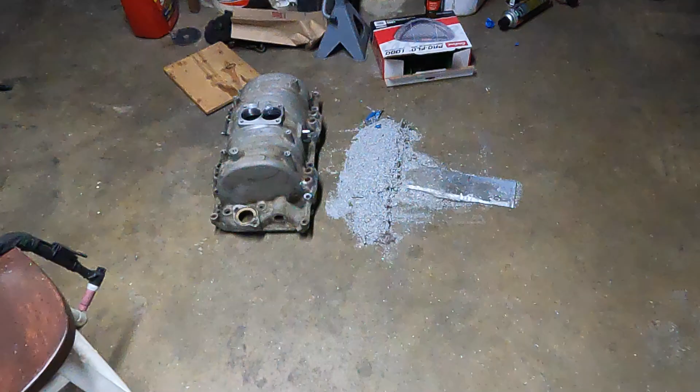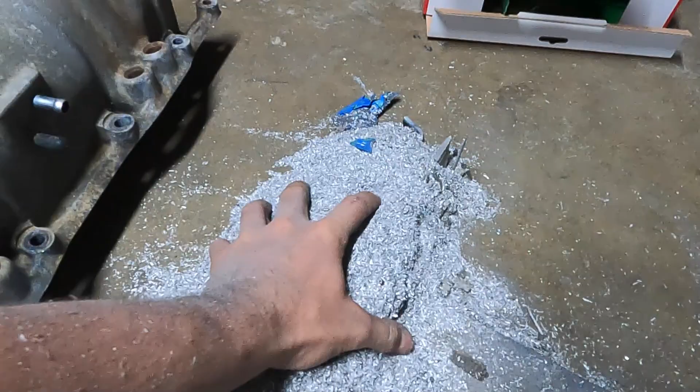I forgot to show you this while making the video, so this will be the intro. This is how much aluminum I cut out of this thing. I swear there's a couple pounds here. So I think this is going to make a difference.

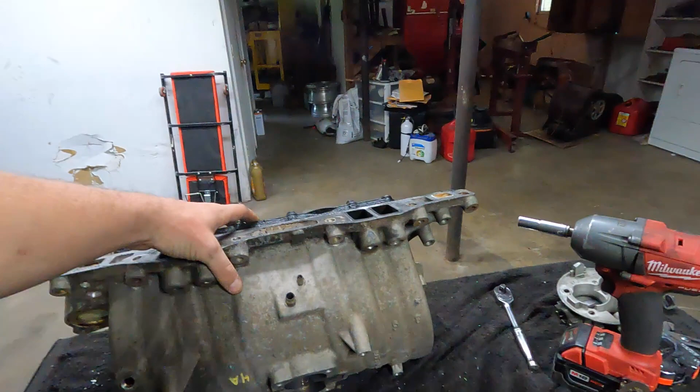So I'm going to get started on the 360 Magnum kegger modification. I was pulling off the bottom pan, so I figured I'd share this first. I didn't have this running on anything of mine personally, I got it from a friend, and he didn't even run it either. The engine came from the junkyard. He put a Speedmaster intake and a carburetor on his.

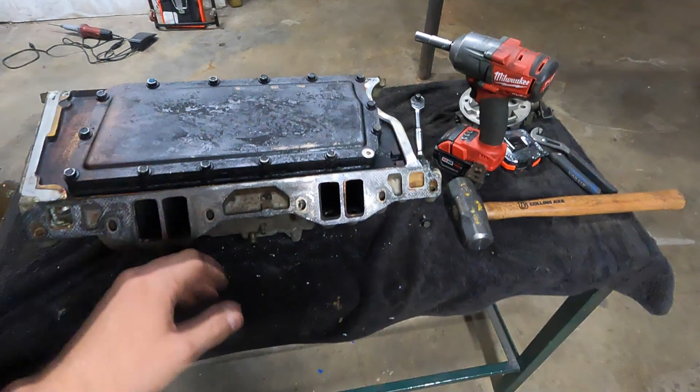But while I was pulling the plate off, I noticed the gasket's blown here. So if you ever have an oil consumption issue with your Magnum or weird running problems, this is a common problem. I've never actually seen it happen on mine, because usually I throw that gasket away and RTV the crap out of it, gray RTV or Honda Bond, it never blows. But that's what you look for. If it's pooched out like that, that's what they do. So I'm going to get this pan off and start addressing and looking at what we're going to do.

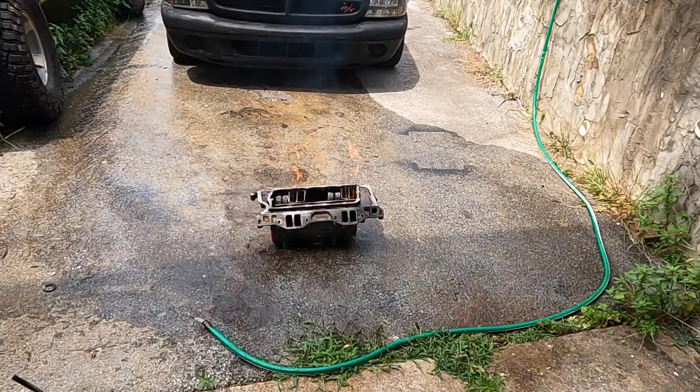I guess I'm going to clean this up. That's going to be the first step, get all this crap out of here, and then we'll move on to cutting that divider out. Right or wrong, this seems to work.

As long as it doesn't get so hot it cracks, watch it melting down the divider, all the oil's just burning out of it. Took a little while, but I got all the caked on crap off. It's definitely oxidized a bit from being harsh with it, with all the purple power and brake cleaner, and I also heated it up a good bit with the torch and lit it on fire. It really helped loosen that crap up.

But I'm going to end up sandblasting it anyways, I don't care, it's fine. I'm not going to touch the inside yet, I'm going to start here. I've already marked this one. I've already marked it.

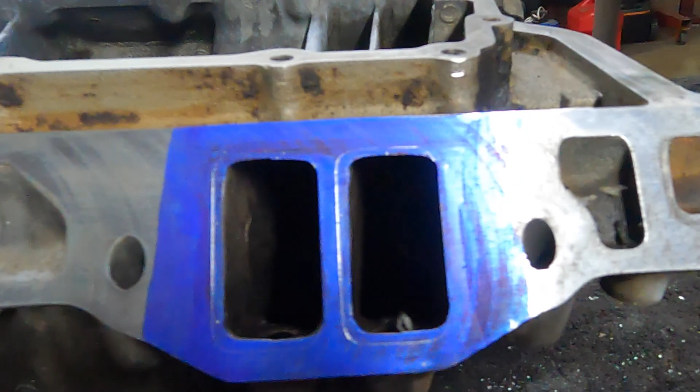What I like to do for the gasket match is, there's always a little discrepancy, you know, because you can see the holes in the slop you have in the holes, it could be off a little bit. So what I like to do is offset it one direction and leave it there on both sides, so that when you put the manifold on... when I had my blower manifold, the runners were like this long, you could just see straight down through it, line up the manifold, tighten it down. This, you're not going to be able to do that. So I like to offset it to one side on both sides, so that whenever I put my manifold on, I shove it to the rear and I'm done.

That should be set. Is it perfect? Probably not, but it's got to be better than putting this in the middle, because then you can't even eyeball it, you can't see it, you can just kind of guess where it's at. So I always offset it to one side, mark it, and that's what I do. So whenever I bolt the manifold on, I set the bolts in, shove it to the rear, tighten the bolts down, done.

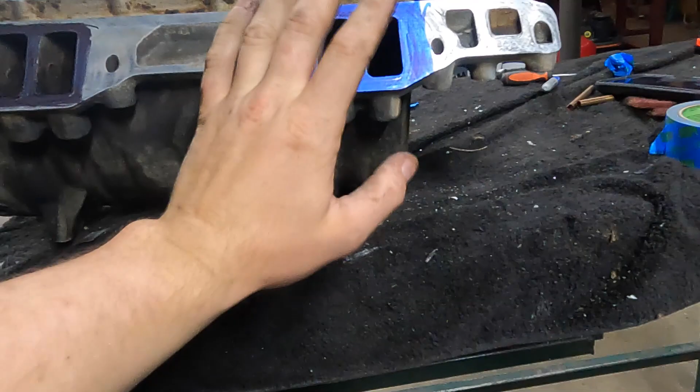So I'm going to get started on this end of it. I'm just going to take everything out to the lines, I'm not going to port that deep yet. I'm just going to do the gasket match, and then I'll work from there.

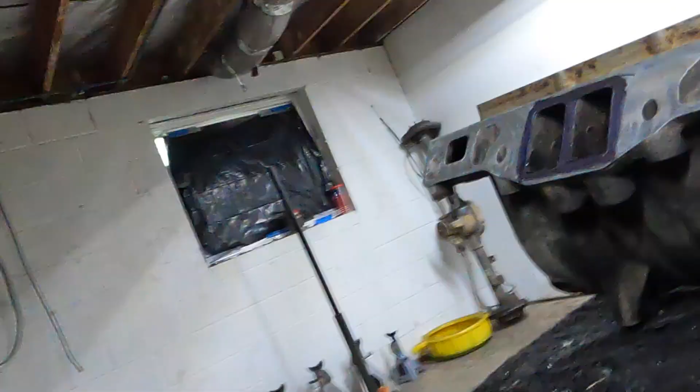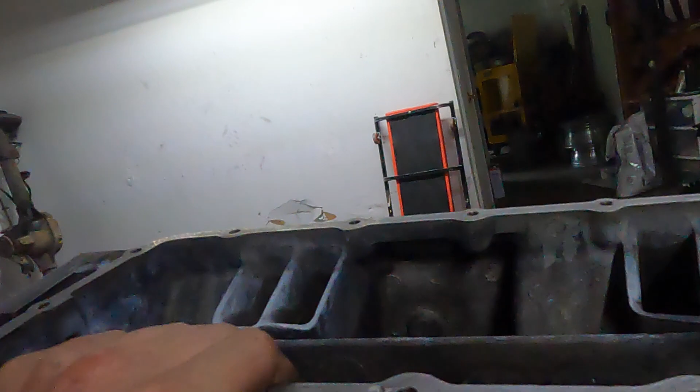I don't see how you're only getting so many inches of runner out of this. These inner ones you could probably get a bit more, and that makes sense, but these outer ones, if you cut this down below where these runners are and the entry is so far down there, I don't see that flowing well. And maybe it does, and maybe I'm wrong.

The last one I did, the one on the Dakota right now, was cut down to here, that's as far as I went. But I also went in and knocked the divider down another inch, thinking that with this much more area to feed the two runners down there, it would slow the airspeed down and make it a little happier coming around these edges. I think the volume reducing plates aren't just reducing volume - with a flat plate right here, I think it's helping the entry to the port.

So if it works, that's why I think it works. As always, make sure you use some kind of wax or something, or else you're gonna have a bad time. I've seen people do this with a Dremel - I don't recommend that, you're gonna be there forever. Just get a real grinder. This one is just a Harbor Freight special, and I've got a Foredom pedal, I think I got it off Amazon. It does speed control, so it's variable.

If you try running these wide open, it can get pretty chaotic. So I'm gonna open this one up, and then I'm gonna stop and get the dividers and calipers out, and we're gonna measure the difference between non-opened and opened. We're just gonna measure the area of the port and see what it ends up at, just on entry.

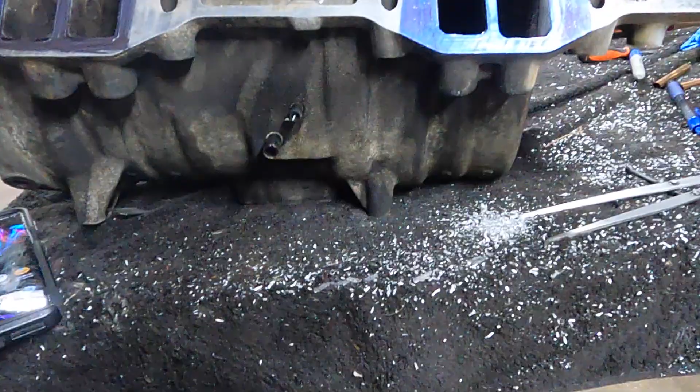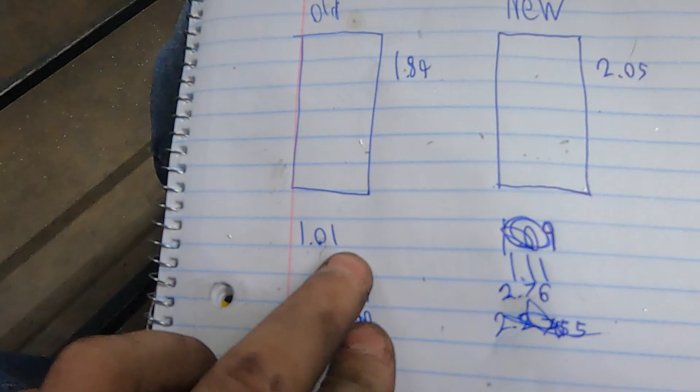Alright, I've got one done, just the first 3/8 to half an inch of the port. So here's not touched, and here's touched. We went from 1 inch and 10 thousandths to 1 inch and 110 thousandths, which looking at the gasket, we gained about 100 thousandths width. Went from 1.89 to 205, which also looks about right. We gained a little meat here and a little up here.

Good jump. Now we just got to see how far down the runner we can open it all up. I've already noticed that once you go past the entry, or exit I guess, once you get past here - let's see, get this dialed in - see, we're tight.

You get back here, it opens up a little bit this way. I think it gets taller as well. So we may not have to work so much of the manifold where we can't get to. Let's see, that's just scrubbing. Yeah, it gets taller.

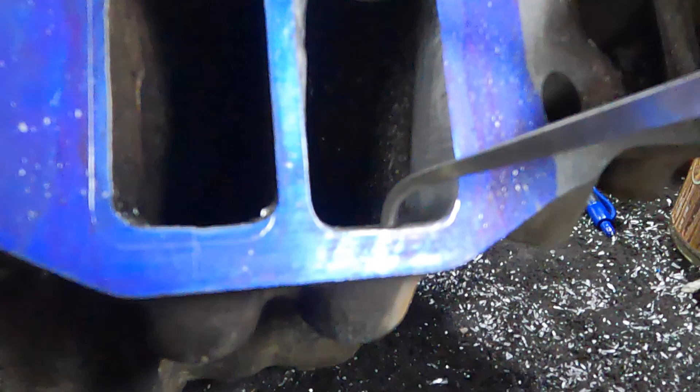So we'll check it on this one that we just opened up. Have it scrub right there. Yeah, so it gets taller and a little wider further down the manifold. Now I don't know if it stays like that through the whole course, but we'll do as much as we can. So I'm gonna get the rest of these to this point, then we'll move forward.

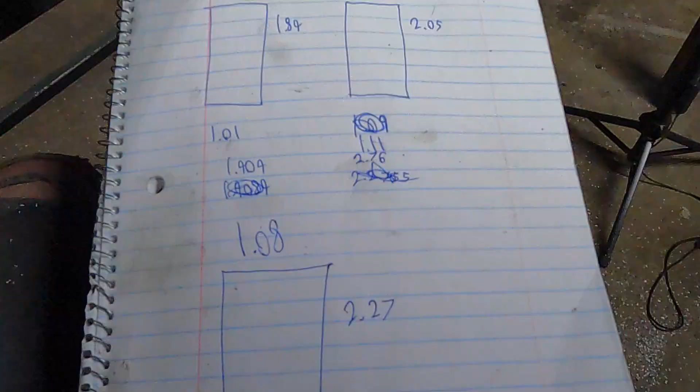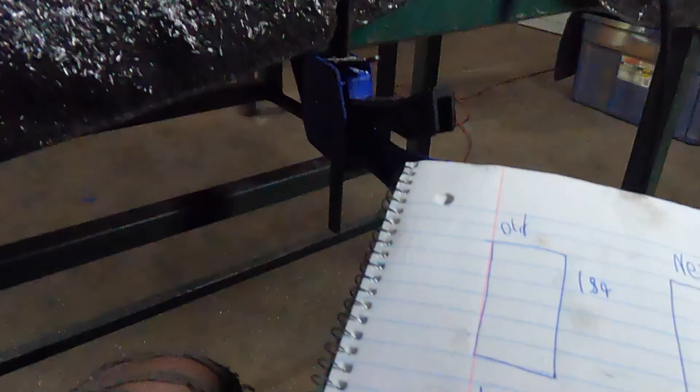We'll see how many thousandths we got to take to make it as wide as this. I could only get so deep, and you kind of got to hit it at a weird angle getting in here. But where I've got it set, see, I still got a little play. But if I go too much deeper, I hit the arm, and if I go right there, I'm a little snug. So I called that our base measurement.

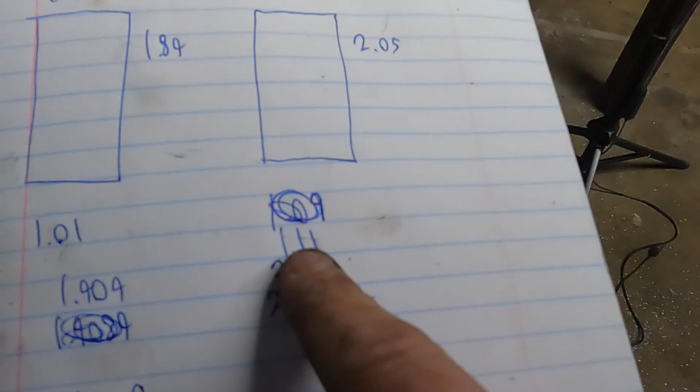We're at 108 width, 227 height, which is still - the width is smaller than our new port, but it's almost 200 thousandths, a little over 200 thousandths taller than our new port. So the height is going to kind of make up for the lack of width, I hope. I don't know how far up the manifold it stays that thick. If I really wanted to get crazy, one day I'll just buy another manifold and cut it in half, but I'm not doing that today. So, alright, longer bit, and we're going to see how far down there we can get.

I've taken this one about as far as we're going to go. Dang it.

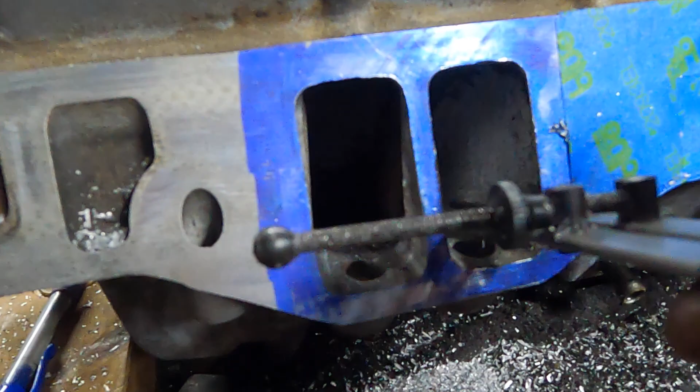Let's see, right there. I can get this all the way, and it's dragging towards the bottom, but just barely. When I hit it with a sand roll, I clear the rest of that up. So this, that wide, all the way down. At that point it's already taller this way, so it shouldn't matter that much more. Where this one is, not so dang much. So now we'll see what our height looks like.

Knocking down where that injector boss is helped the height a lot in that area. And then it's just big in here. I don't know how big that is because I can't measure it accurately, but it's bigger than this, so

that's probably fine. So I'll be doing all the rest of these, and if you're doing this when you can't see anything, don't blow in the damn port, because it'll just shower out of the other end. Like I did.

Alright, I'm going to get after it. This side of the intake has had a lot more core shift. I'm having to pull most of the meat out of this side of everything, so I've barely had to touch this wall and this wall. It looks like it's going to be the same down here at this end, so everything is shifted. I guess it's actually shifted that way. And that's why I'm having to take a good chunk - that's a 1/4 inch right there at the top.

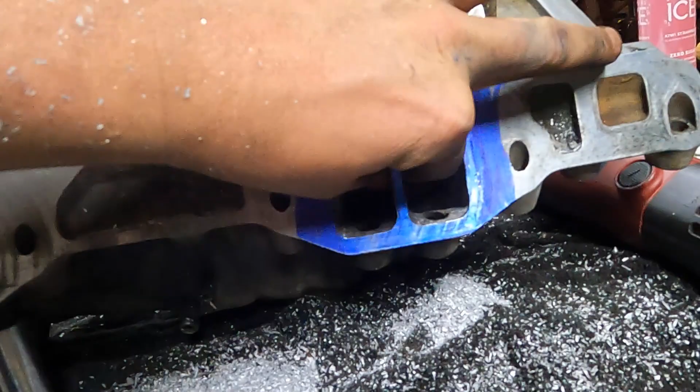It's not so bad on these two. This one, I just cleaned up this wall because it was already straight in, so I had to make this fairly thin, where the other side I was able to kind of split the load between both walls. This one I had to take most of it out of one wall, so it's still fine. It should be just as thick as this side.

Yeah, but I got 3 more to go. So all of this side is done. I've decided I'm not going to use those plates since I'm going to shorten the runners as far down as I can. I'm just going to come down to this level. So I'm cutting this divider all the way out.

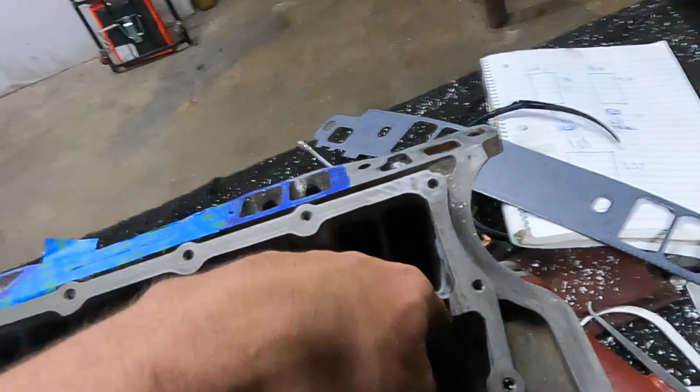I'm just going to take my bit, run it down both ends until I go all the way through, and then run it across the bottom until it gets thin and just knock it out with a hammer. It really wasn't that bad. I ran it down this side and ran it down this side till it went through, and then I just started kind of grinding along the edge of it at the bottom.

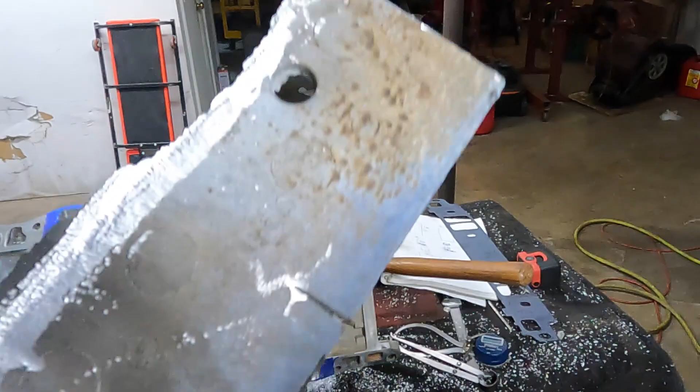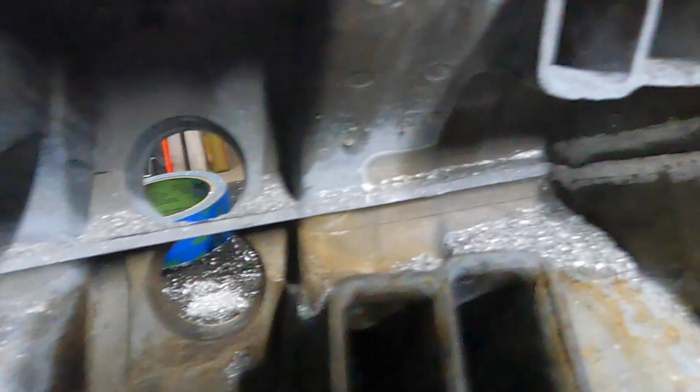I didn't really even do that much. I just ground it and smacked it with a hammer and it broke off, and this is all that's left. So I'll start working all that out of there. Do yourself a favor and get an intake without that divider.

I mean, this one was free, so it was worth it. If I was going to go buy one, I'd go hunt one down without the divider. I don't know the year split, but I've had several that don't have the divider.

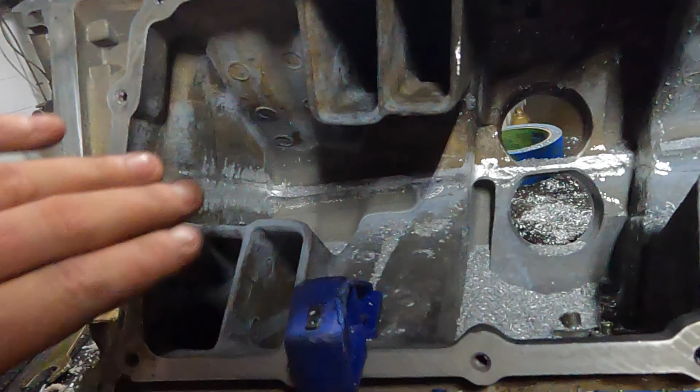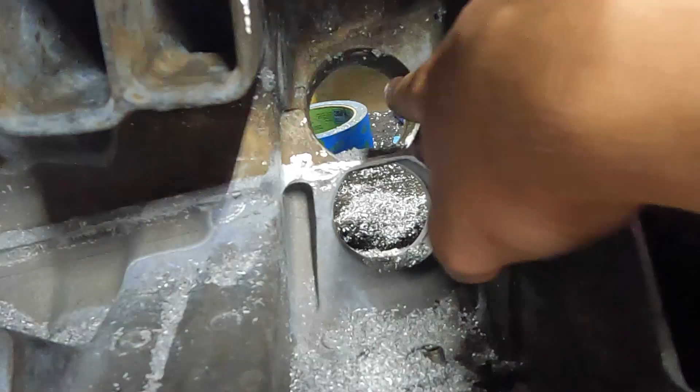So I'm going to leave this alone because I am going to put something in there. I'm not going to put that whole plate, but I'm going to cut the runners down to here, so I'm going to fill that little bit. I'm going to go ahead and do that much. So I think I'm going to leave that part alone for now.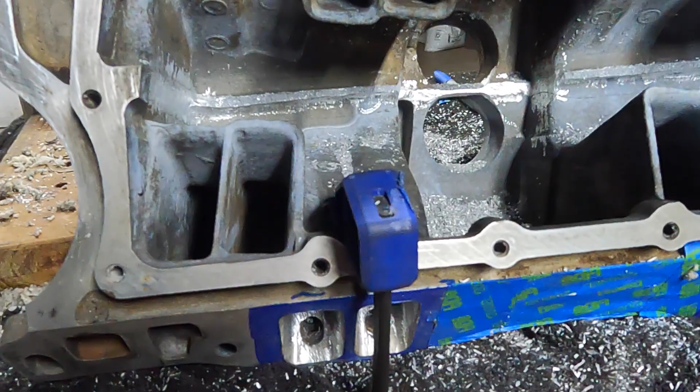Now I'm going to get to cutting these down, and that's going to take a minute. I may change to a very aggressive aluminum bit and just eat through it. I'll try to zip wheel as much as I can and knock it out of there, but this is going to be a project. This is a spot that the little Dremel with the disc might help you because you can get in there, but you're going to be there forever.

This is about 6 hours yesterday getting this side done. I've got about an hour and a half, 2 hours in getting to this point in here. I probably could have done it faster. So there's a lot of hours in doing this. Hopefully it pays off when we dyno the truck again. But I'm gonna get the zip wheel and get after getting as much of this off here as possible.

This is after taking a zip wheel to it. I didn't get super close. I'm going to take this all the way down to here, but I'll be using porting bits from now. You just cut as much as you can. You don't even have to connect your lines. Just get them close, smack it with a hammer, it's going to break off.

There's all kinds of chunks. Lots of chunks. If you didn't connect the cut, it'll break. So now, several more hours of grinding just to get these down to here, and then I'll actually start porting it and opening it up. This is just getting the runner shortened.

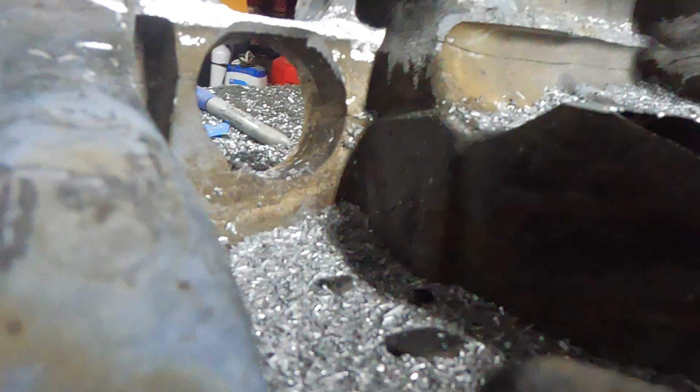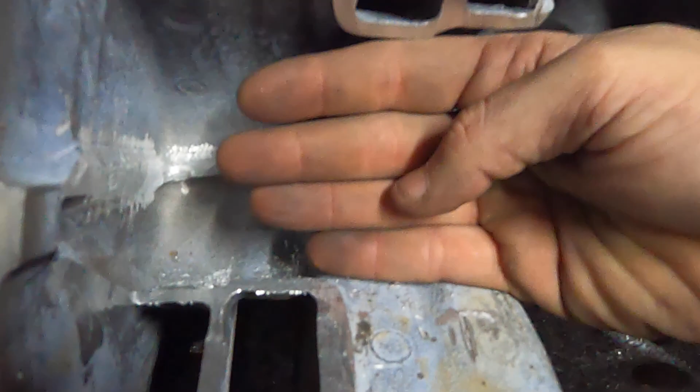I want to fill this in somehow. I don't know if I'm going to take a straight piece across. That's probably what I'll do, I'll probably just put a plate in there. I thought about trying to put a rounded plate, like a piece of tube cut off, to give it more of a bell mouth, but there's no room. There's nowhere for it to really go.

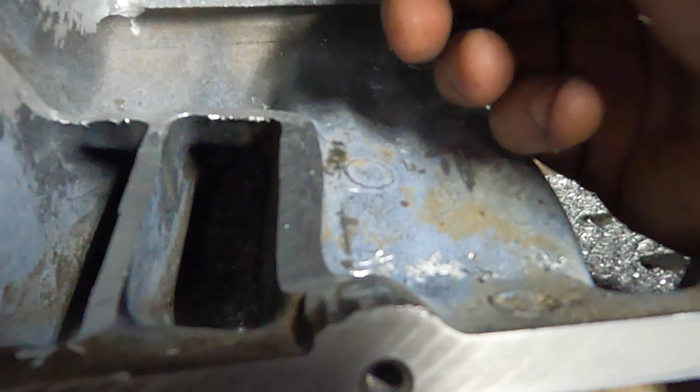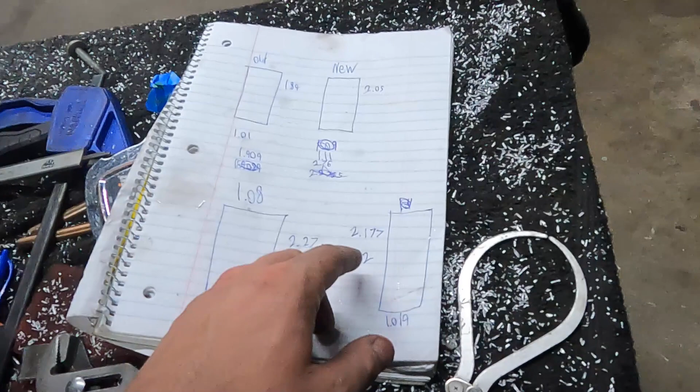Doing my best to keep you in the loop as I go. I'm about to start porting the runners, trying to keep everybody in the loop as best as possible. So I'm going to start porting the runners on this side. I've measured them as is: 2.177 tall, 1.019 wide.

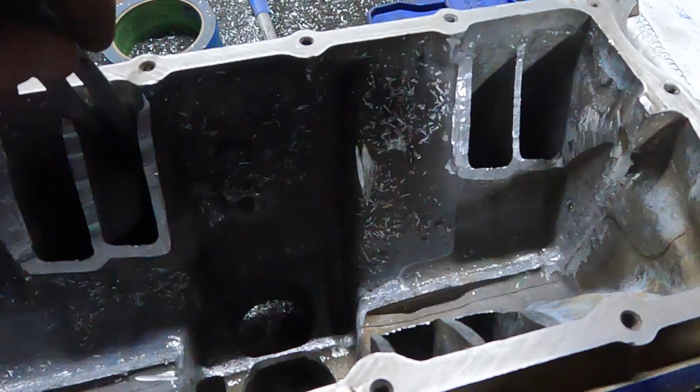Now on this side I've noticed the variance is different. Some of them the divider fits really loose in, like that one, and then some of them it fits a little snugger. So this is close enough.

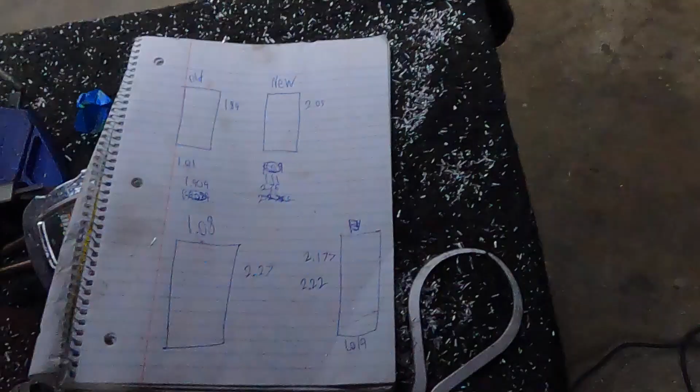So we've got an area of 2.22, and remember our new area on the cylinder head side was 2.76. Now this is so tall, it's not going to take much to get this to surpass that, and I think that's what we want to do. I think we want to go a little beyond, but that's what I'm going to do. We'll find out, dyno will tell us.

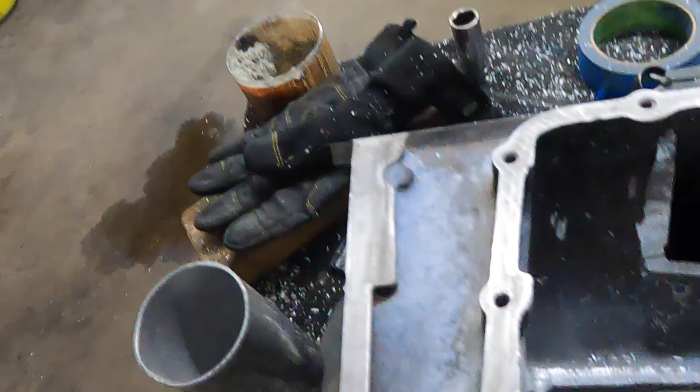I've also got an idea where I'm going to fill this in instead of having a flat plate. I think I'm going to cut this pipe in half and kind of flatten it out. I think that's a good idea. I don't know, I'm going to try it. It should take up some area and help port entry, I think. Maybe.

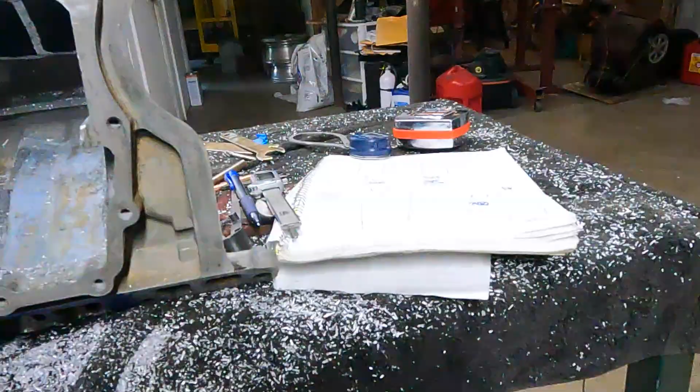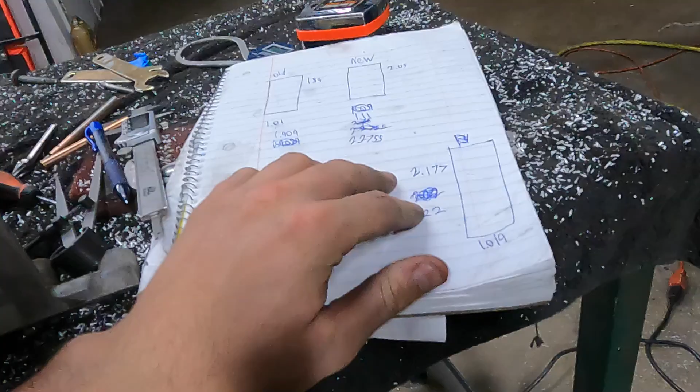Well, I messed that all up. It looks like I wrote it down right the first time. The difference between here and here was so far off, I was like no way, I must have done something wrong, some math wrong. We're still good, it's still better. But we had original 1.9. This is 2.27, not 2.76. I missed one number, so I was like why can't this get there? And that's why. Math, same thing.

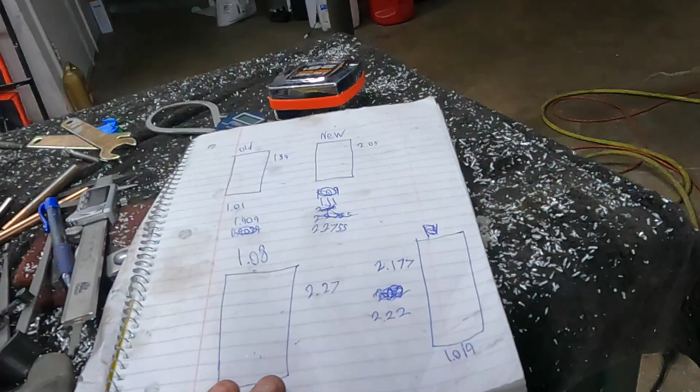So, 2.275 on the new, and this as is 2.22. So we don't have to work it that hard to get there. We're just going to clean everything up.

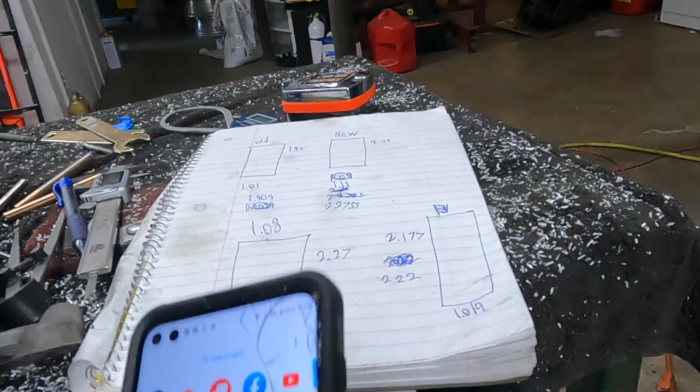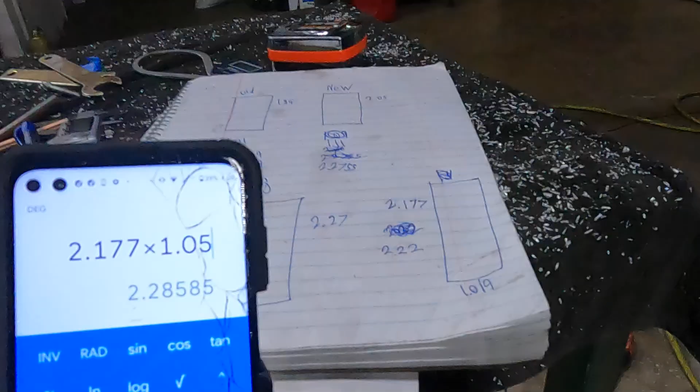So sorry if I led you astray there for a minute. Hell, I led myself astray, but it's going to be alright. I'm going to get back after it.

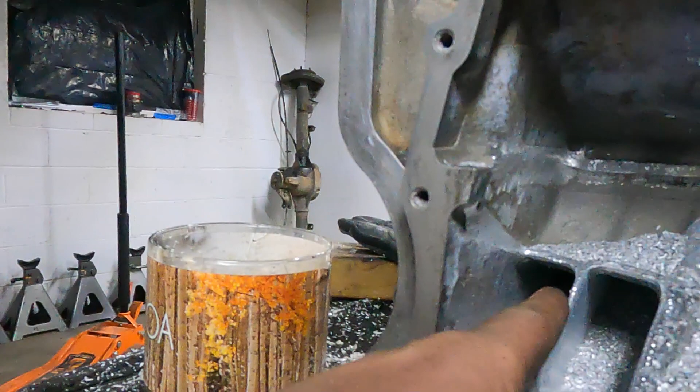Alright, the runners are done. Now I've got a couple places - be warned when you go this far, you'd back off those widths, and you got to pay attention to the core shifts. This one I couldn't. I shoved this wall all the way over, didn't touch this, but I still could not. I mean this is thin as hell. But to get it the same width as all the others, I ended up busting through right here. I could hear it getting thin but I just hoped I'd make it. Just barely busted through, so now I've got to weld that up.

There's a spot right there, a spot up right there. And one of these on the outside I blew through. It's in one of these corners.

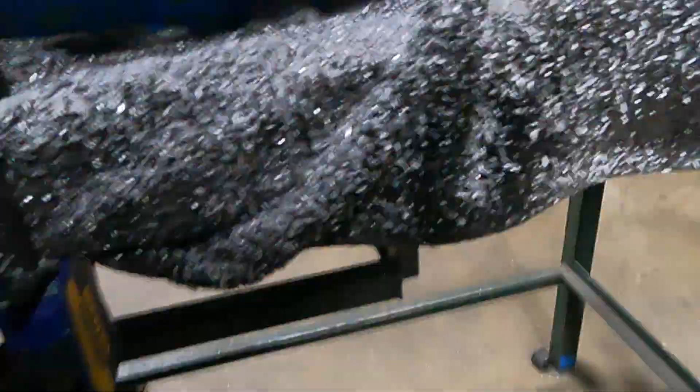So just bear in mind, maybe don't go as extreme. Well, as long as you've got a welder, go after it. As long as you can get to where you blew a hole in it, you'll be alright. Weld it back, put it a little thicker right there, and grind even more.

So I'm going to fix all the holes I put in it, and the pile of aluminum is getting really big. So I'm going to get all this mess cleaned up, fill all the holes, grind them back down.

And then I'll start mocking up the tube if I'm going to do that. I still may not, I think it would kind of act like the volume reducing plates, and maybe even make it a little better being round. I don't know, but we'll see.

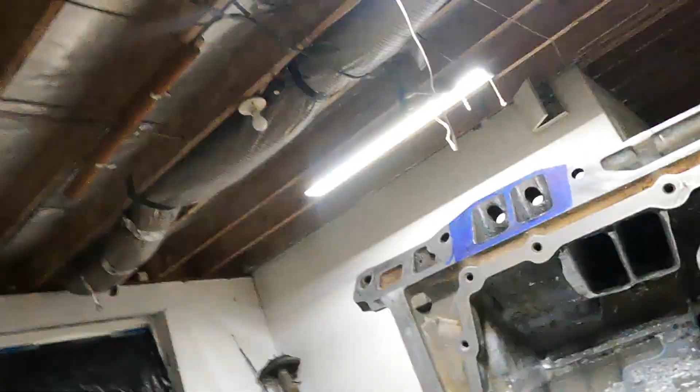Got everything, I got all the holes I put in it welded back up. Now I've taken that piece of 2.5 inch pipe and kind of flattened it out a bit. I think that's going to work. So I'm just going to trim this thing and get it ready to weld.

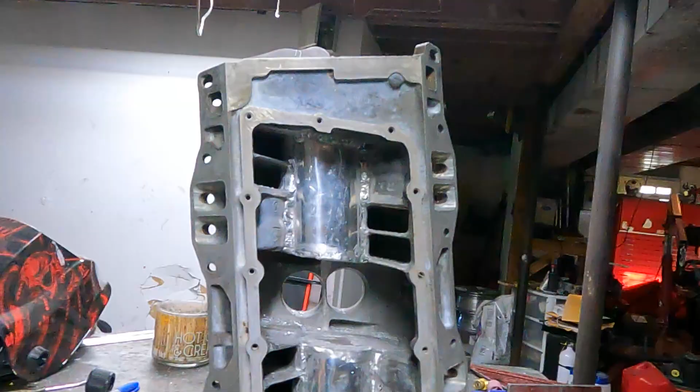Well, it took a while, but they're capped in now. So I got volume reducing plates, kind of, just a little different. So I'm done everything on the bottom side of the manifold.

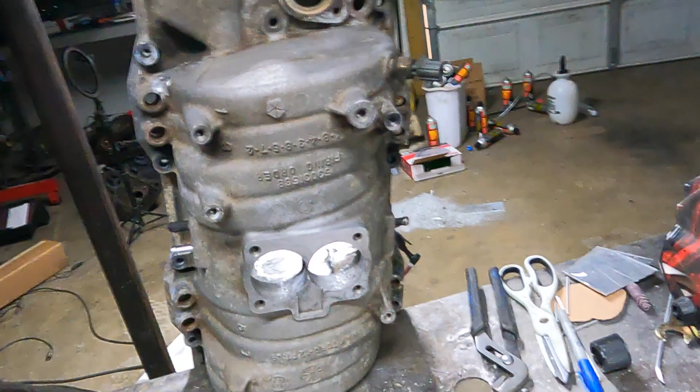I've still got to clean and get all the crap out of the intake before I put it on the truck. The only thing I'm going to do next is mark up where the throttle body goes and take it as far as the gasket goes. I'll go bigger than the throttle body goes. I haven't set the gasket on there yet, so I don't really know how much I can take out, but we're going to take all of it and taper it as far as we can.

I was going to fill these in, but I'm not going to do that. I don't think it's going to matter that much. If this intake manifold actually works, if it makes any more power, then I'll probably do another one and do it similar but a little nicer. I just really want to have a proof of concept, make sure it actually makes any more power. If it doesn't, then this isn't worth doing, because I've shortened it. Now I didn't shorten it drastically, but I think you're blocking flow at that point.

I don't know, but volume reducing plates, I've opened the ports as big as you can go. I even put holes through stuff, so they're big. Everything's where it should be. So if it doesn't make a difference, then it's not worth doing, but we're going to try.

I'm going to get the intake or the throttle body side ported, and then if I feel like it, I'll put it on the truck tonight. So I'll get that marked and we'll see what it looks like.

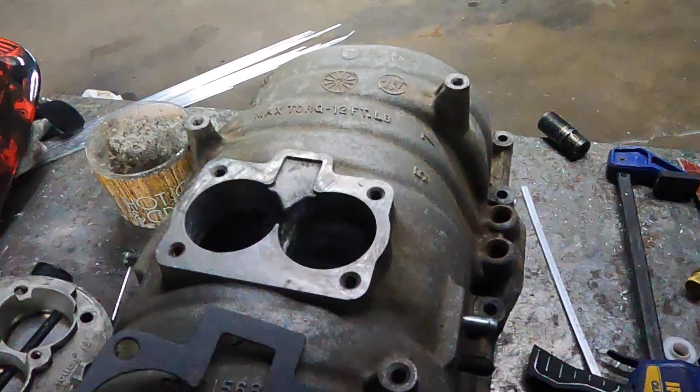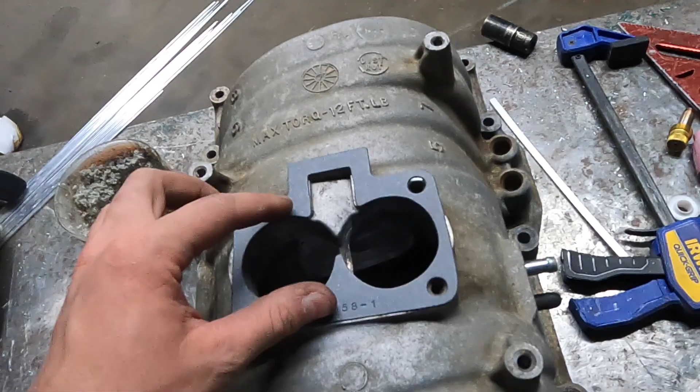Well, the gasket's smaller than the hole is right now, so no point in porting this crap with this size throttle body. I am going to go ahead and port the bottom side. I'm not going to open the top up anymore. I'm just going to taper everything else in.

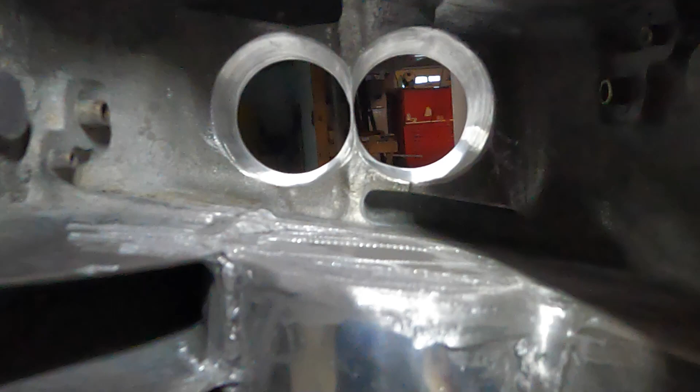And that's it on the throttle body holes. I just tapered them as far as I felt they needed to go. The center's pretty thin, but it'll be alright. I'm sure it opened a little bit on the top side, but I used the aluminum bit down here at the edge and tapered a bit, and then I sand rolled the rest of it.

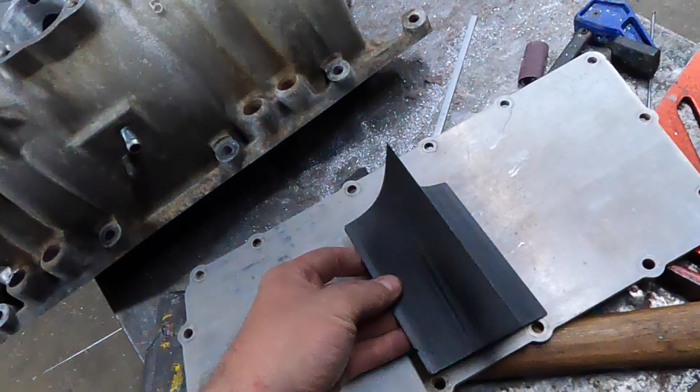So I think I'm just going to clean it up now and put it together. I've got this too, but I don't want to put it in yet. Thomas 4acre also sent me this and this plate, so thank you very much. I'm just going to use this plate, put it together as is, so it's similar to what's on the truck, except that it's all the way ported.

The other one doesn't have any volume reducing anything. This one does. This is about the same length runner. The other one's probably actually a little shorter, but this one's fully ported, and I think the amount of meat that I took out of everything, I think it's going to make a difference.

But I'm not sure what this is going to do, so I don't want to put this in yet and kind of spoil the results. I just want to see what this does with the plate. The other one's already got a plate on it too. If it makes way more power and everything works, then maybe I take it apart and put this in and see what that does. At some point, I'm either going to make one, the oil splash tray, so it keeps oil up off the intake.

But so I'm gonna get to cleaning, and I think next time you see this, it's gonna be on the truck. So hopefully that's tomorrow. Anyway, hopefully that helps everybody out.

I wouldn't do anything until it makes a crap ton of power on a dyno, because if it doesn't do anything on a dyno, I would never waste my time touching one of these. So I'm putting up this video after I know what it made on a dyno, so the last comment about if it doesn't make a bunch of power, I wouldn't do it. I know now that it does make more power. It's only 15 horsepower, I think the headers are holding the truck back, but like 20 foot-pounds of torque through the middle, like almost everywhere. So it was definitely worth doing.

So that's just my take on that.